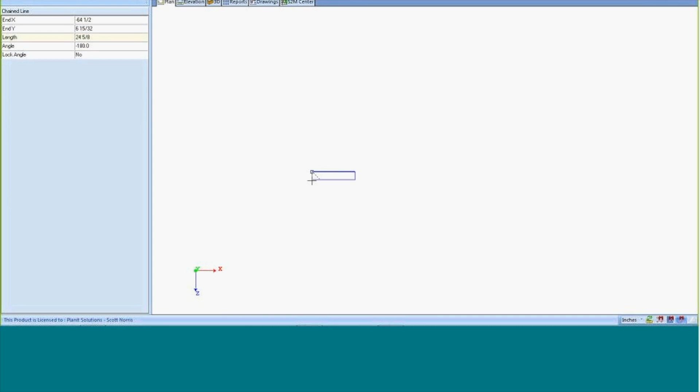If we click on the back wall, click on elevation, go to 6, you will notice you have a Planit Closets V8 catalog in your system now. That's part of the Planit Closet package. If we click on the Planit Closets V8, notice you'll have closet panels and then all the sections.

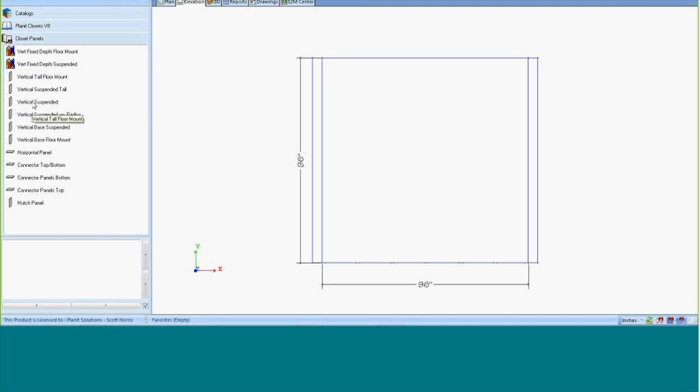Click Closet Panel. First thing I'm going to do is simply throw out my panels and then position them. So I'm going to go a vertical suspended. I'm going to right click and copy it, and when I drop it, I notice I'm going past the wall. When I drop it, it snaps right to the edge of the wall.

And I'm going to grab maybe some floor mounted panels, put this out in the center, and then right click and copy this. I'm going to use my clearance. So in the upper left hand corner where it's highlighted in blue, I type in 30 inches. What that does is position it 30 inches apart from the panel.

From here, maybe I want to position that center section right in the center of the room. If I rubber band around both of them and simply right-click on one of them, I move them. That creates one big object box so I can move it all at one time. Okay, center position. This is a 96-inch wall, I'm just going to simply type in 48. It's going to center everything right in the center.

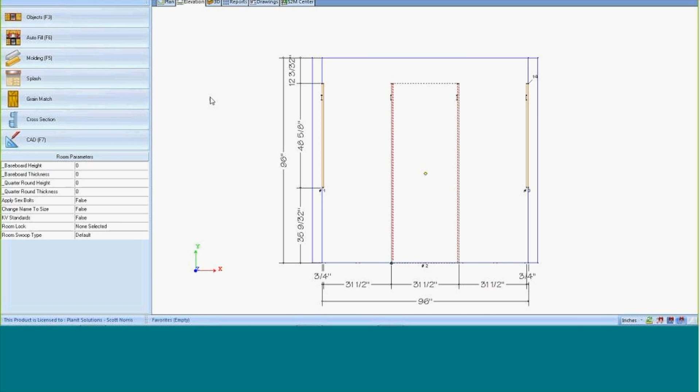Here, all we'll do is grab my sections. So let's go ahead and grab some hanging sections, suspended, hang, drop it here, maybe a long hang, this one out here. In the section, let's go ahead and put shelving in there.

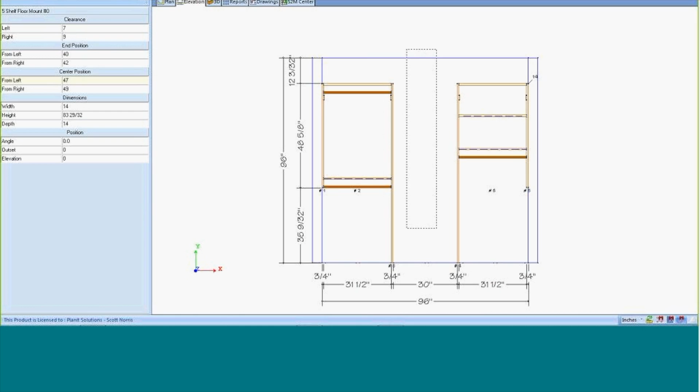And then you notice the object box, or the dotted line there, is smaller than the opening. When you drop that thing, it's going to position itself and also stretch to fit and be the two partitions. Everything is nice and tight.

From here, we're going to use some options that we have in the system with the closet package. The first option is my baseboard heights. If I simply type in my baseboard height of 4, maybe a 1 inch thick, and then we have quarter round as well. So we'll go 3/4, 3/4. So a baseboard that's 4 by 1, and then I have quarter round that's 3/4 inch.

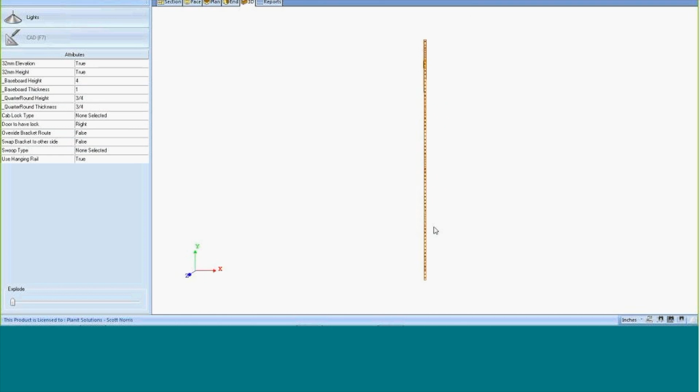What that did is actually put it in operation on the bottom portions of our panels, so it notches itself around that baseboard. As well as the center section here - look at this thing closely. The adjustable shelf has its 13 and 31/32. The shelf here actually cuts back 1 inch because that baseboard comes right behind it. To accommodate, depending on how big the baseboard is, it will accommodate things that are stuck in front of it. That way you don't have to cut things down in the field.

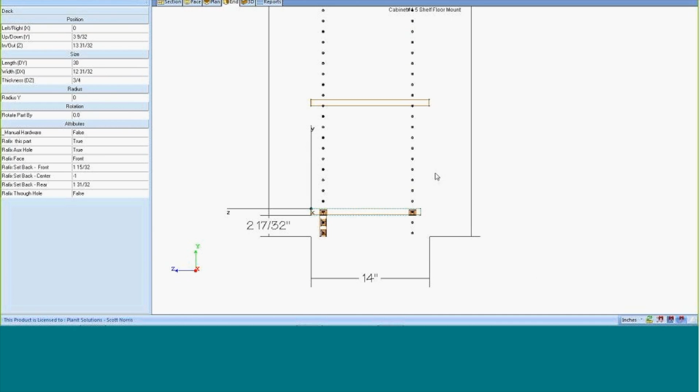The reason this is here is because you can actually control exactly where you want it to go. If you keep it true, it's going to fall to the nearest bore pattern. If you change it to false, it's going to go exactly where you want it to, which may not fall on a 32mm boring system.

So if you change it back to true, you'll notice it went back to 40 5/16 instead of 40. So the holes will line up across your system. I'll put that thing back where it's supposed to be - just click it and drop it, and it snaps to where it's supposed to be.

Also, the 32mm height - what this means is I control the height of the panel as well. So if I take the panel from 48 5/8 to 30, you notice the panel went to 29 and 30 seconds instead of 30. If I switch that to false and take that panel, say I want to go to 35, it's going to go to exactly 35, which is not a true 32mm system.

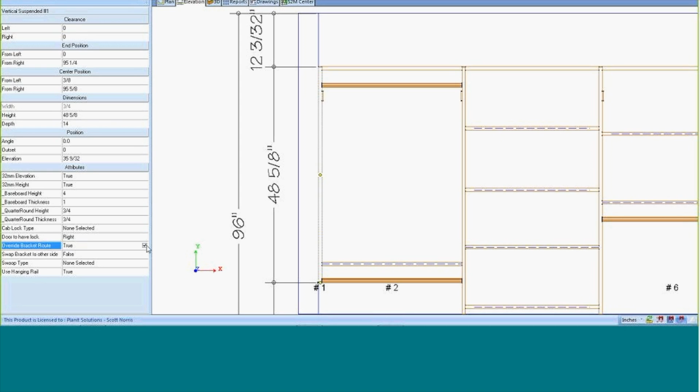I also have the option to swap brackets from side to side. For instance, in this section, maybe I want the brackets to be on the inside for whatever reason. If I click on the panel and swap the bracket to the other side, it simply swaps the bracket to the other side of the panel. Same thing on the opposite panel here, and that will put the operations on the other side as well.

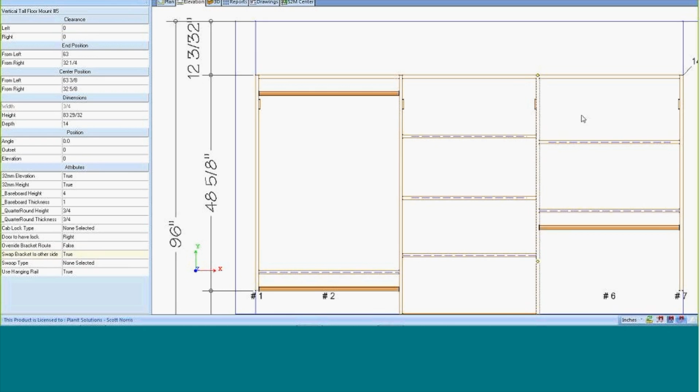The other thing is maybe I don't need this. Since this is floor mounted, maybe I don't need those suspension brackets. I can simply come down here and say use hanging rail, and turn them off. For this, let's go ahead and leave them off.

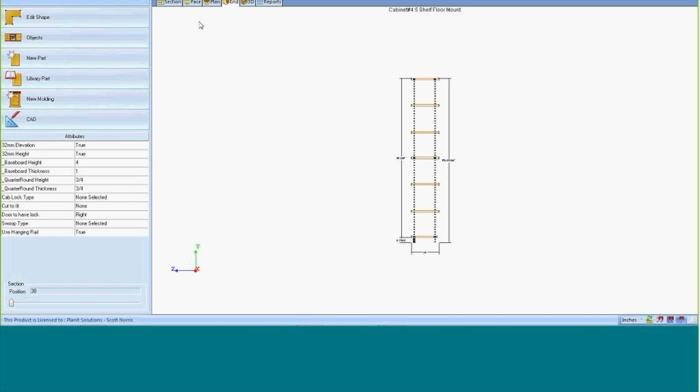Let's go ahead and show how easy it is to create your section out of an existing system, an existing section. If we click on the center section and edit it, I'm going to do the section view. First thing I'll do is go to the face view and delete everything that's in the system, which will leave me with basically a top, a bottom, and a toe kick. So I can actually build that section.

First thing I want to do is actually split the face of the cabinet, or the face of the section, into however many openings I want. So if I want drawers on the bottom and shelves on top, I'm just going to do 2 equal openings.

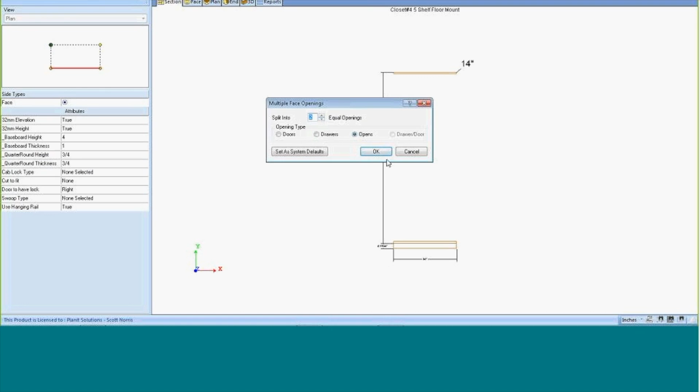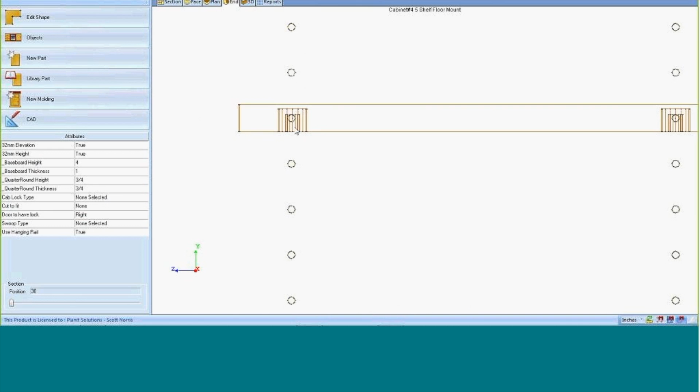Then I'm going to go inside the section and put that shelf where it's supposed to be. So I'll click on horizontal member, click on that line, and it drops in a fixed shelf. If I look at the operations happening and look at that shelf specifically, you can see the Rafix fittings are actually dropping right down to line bore, exactly where it's supposed to go. Let's look at that a little closer as we drop more things into the section.

So what I'm going to do is go back to my face view. I'll click on the bottom half of this and split it horizontally multiple ways. I'm going to stick in 4 drawers. That basically created 4 equal-sized drawers in that opening.

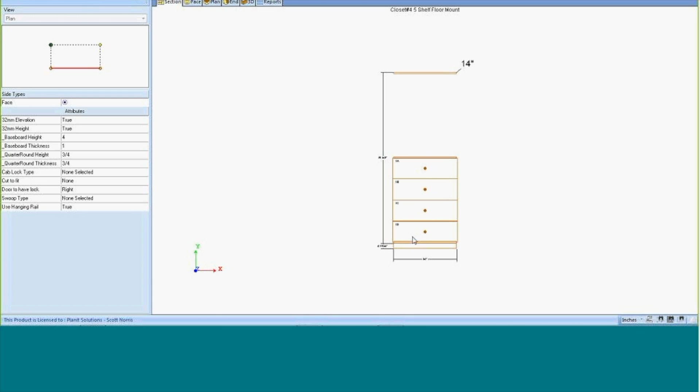Maybe Mrs. Jones wants a 10-inch drawer on the bottom and 3 sevens above it. So how do we make that? We click on the bottom, type in 10 inches, and hit enter. It automatically defaults back to 9 and 31 thirty-seconds. The reason for that is it's actually falling on a 32mm system. So I'm going to go ahead and lock that height on the bottom.

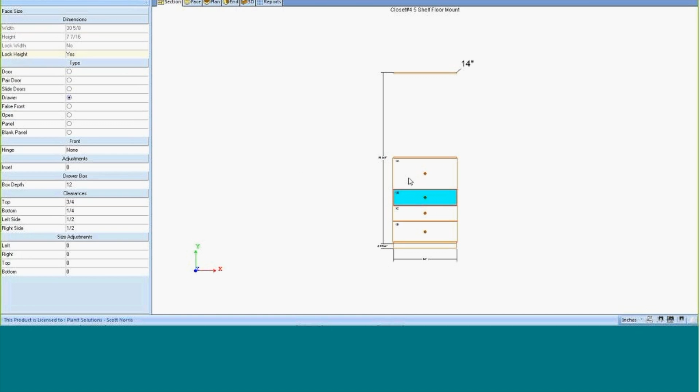As I work my way up, I'm at 7 here. Let's go to 7 and 7/16, again another 32mm system boring pattern, and lock that one. As I work my way up, I'll lock each one so the one below it won't move after I've already changed it. Then notice when I use the top shelf or top drawer here, that shelf is going to come right along with it. So I'll hit 7, and you notice that fixed shelf drops down with the top of that drawer, so our reveals stay exactly where they need to be.

Let's go ahead and put in the adjustable shelves, and then look at the system. So I can say adjustable shelves, equal openings - if I say 3 equal openings, it's actually going to put 2 shelves in. So I'm going to say I need 5 equal openings, which should put 4 shelves in.

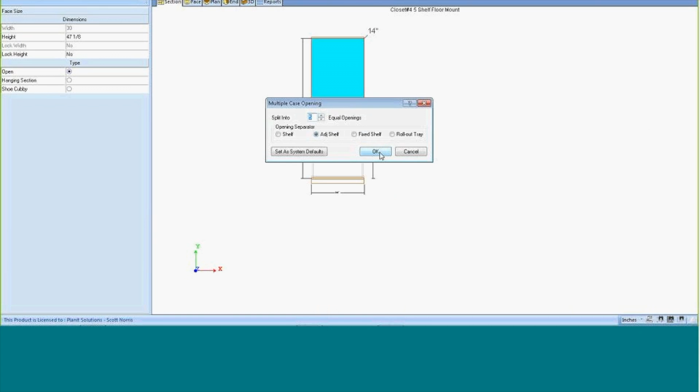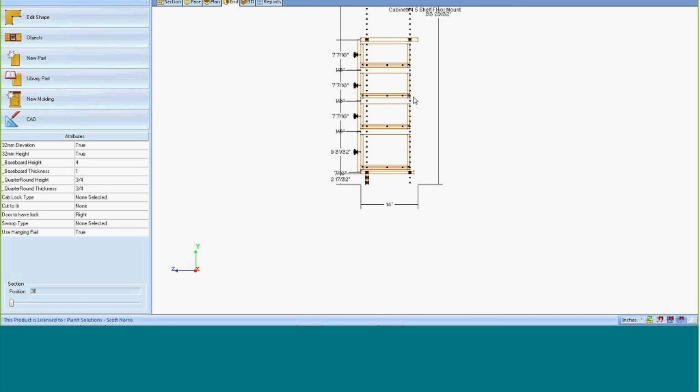Now, since I have my shelves and drawers in, let's go ahead and take a real close look at the operations happening and where those pieces are actually sitting. If I roll out here, you can see the operations for my drawer glides are lining up with line bore, as well as my drawer gaps lining up with line bore, and my reveal, depending on what your top and bottom reveal is, dropping right where it's supposed to go. My adjustable shelves are sitting right where the line bore is, or at least where they should be - everything is just happening like it's supposed to.

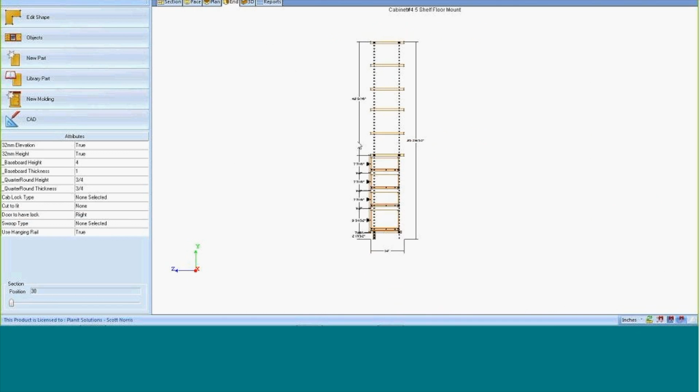Let's look at a couple other options - Rafix fittings. If we zoom in here, you can see the Rafix fittings on this shelf. I'm going to double click on the shelf, and we can take a look at what's really happening. So the shelf has a cam hole with an outrigger hole. Same thing on the other side.

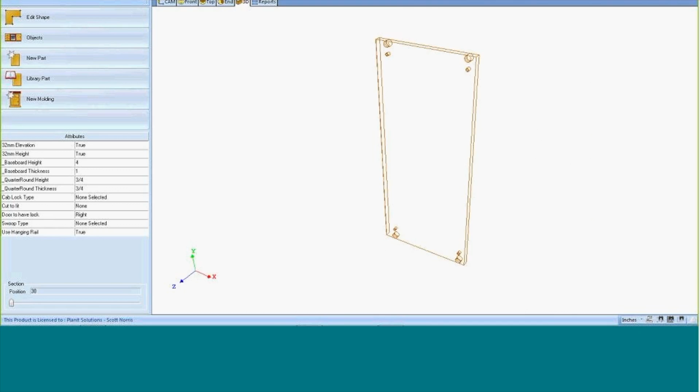What I'm going to do is actually start modifying some of this stuff. If I click on it, click on the shelf, I have my options over here again. The Rafix this part option - if I change that from true to false, the Rafix fittings goes away, which is not what we want to do on this part.

Let's look back at the Rafix auxiliary hole. Change that from true to false, and that's what happens. Typically you'd take the outrigger hole off the part. So the auxiliary hole is actually the outrigger hole on your cam.

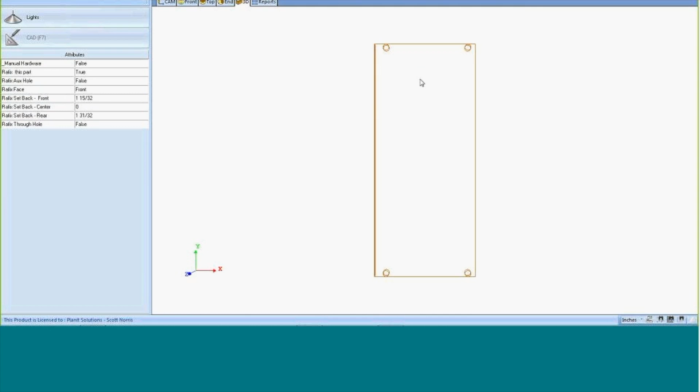I'll turn that back on. There's a Rafix face option - I'll change it from the front face to the back face. Basically, it flips it to the opposite side of the part, since you may use this to gain access for tightening the Rafix fitting down. We also have another option, I'll put that to the front, to tighten the Rafix fitting from the opposite side that it's drilled on.

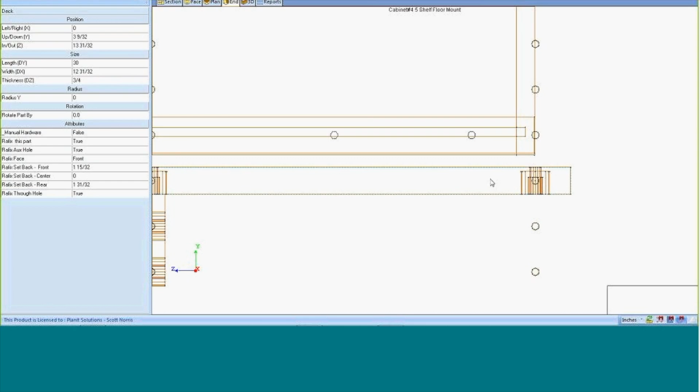If I turn the Rafix through hole on, changing it from false to true, you'll notice there's an operation in the center. What it does is drill a hole all the way through the part, so you can bring the Rafix fitting down from the top of the part versus trying to get a screwdriver up underneath and tighten it from the bottom. You can tighten it down from the top and then place a cap over it.

So there are a couple few options that we have with the Rafix fittings.

I'll change that back to false - actually, I'll leave it to true. You also have the ability to move the Rafix fittings. So the fix setback from the front is the distance from the front to the center of the Rafix fitting. If there was a third line bore in this panel, which there's not, it would have a center setback, so you'd be able to control that center Rafix fitting if there was one.

And the back Rafix setback in the rear is the distance from the rear of the panel to the center of the Rafix. Let's change that to 8 inches. What that does is push that Rafix fitting on the back of the panel forward.

Now, if you change that and want to get it back to what it originally was, you can simply shut the Rafix off and turn it back on, and it will automatically reposition itself to where it's supposed to be.

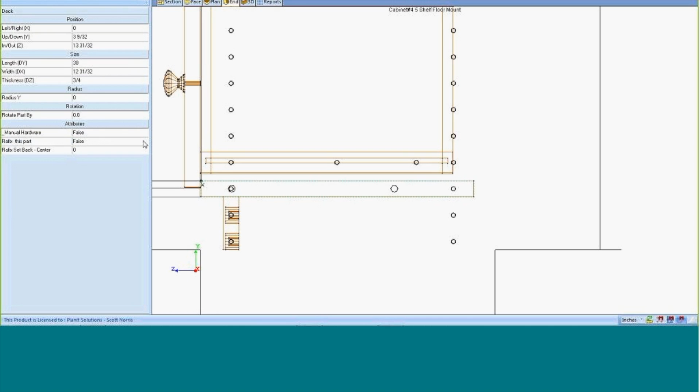There's actually a cut-to-fit option in the system. Sometimes closet installers like to not drill this portion or that portion of the system and actually oversize it, then cut it down and fit it to the wall on site.

If you click on a section, you also have a cut-to-fit option here, with a drop-down for either the left or the right. Depending on which you pick, it's going to oversize that section on the left side or the right side.

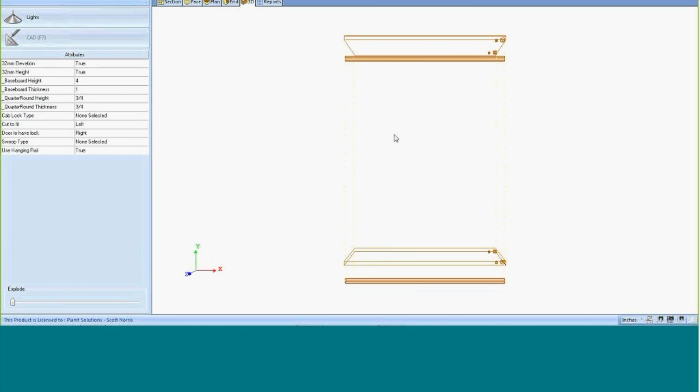If I click on the left side and look at this section now, you notice that the left is not drilled. So the top and the outlet rod are 4 inches bigger than they're supposed to be.

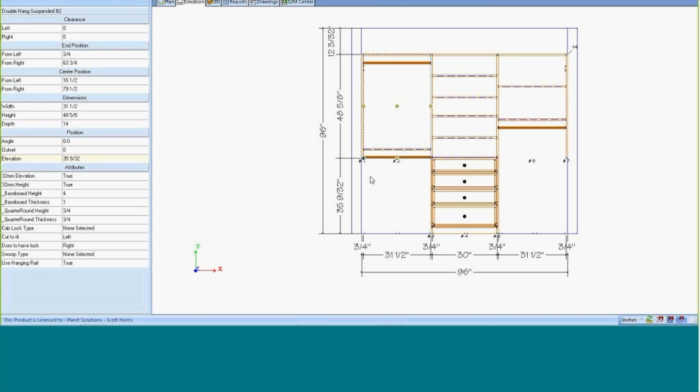The setting in our system oversizes those parts 4 inches bigger. If we look at the actual section, you can see it's supposed to be 31.5 inches wide, and they're actually 35.5 inches wide - oversizing those parts. Pretty cool feature if you actually go and cut things down on site.

So basically, that's the closet module and all the options.

Now let's go ahead and look at making this a pretty presentation. I go to Plan View, right-click on the screen, and go to Drawing. What that does is take a scalable image.

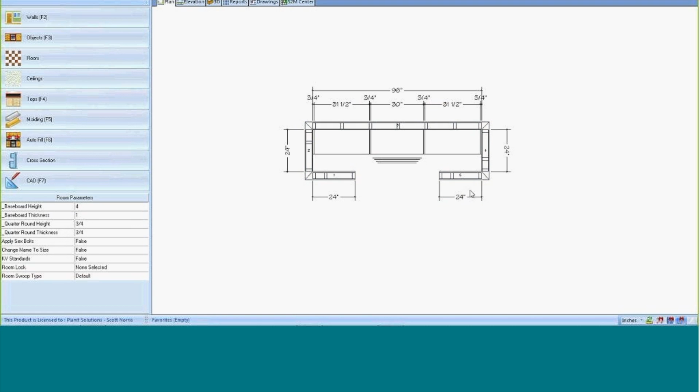I'm going to go to the elevation, click on the screen again to Drawing, taking another scalable image. Now I'll go to Plan View and turn on and hide those walls.

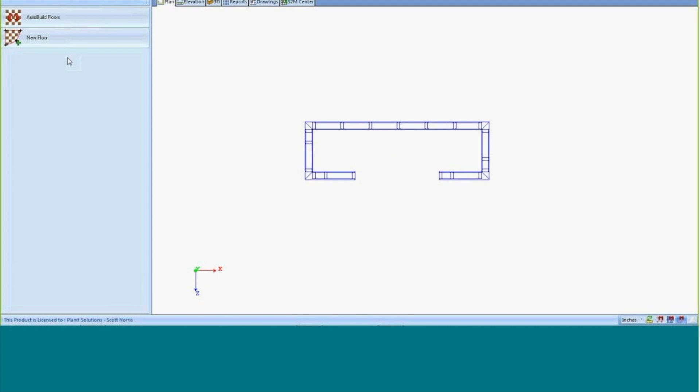Simply go into 3D mode. Now I can actually view the closet itself without those walls sticking out in front of it. I'll go back to a plan view and throw in an auto build floor, so we basically put a floor object in our system.

When you're in 3D mode, you can click on textures here. Click on floor and grab one of the floors, then click on the back wall or on the walls - we'll just do a rough plaster. They kind of look pretty.

Now if we go to PhotoVision, we can go to full architectural and see what this closet's really going to look like.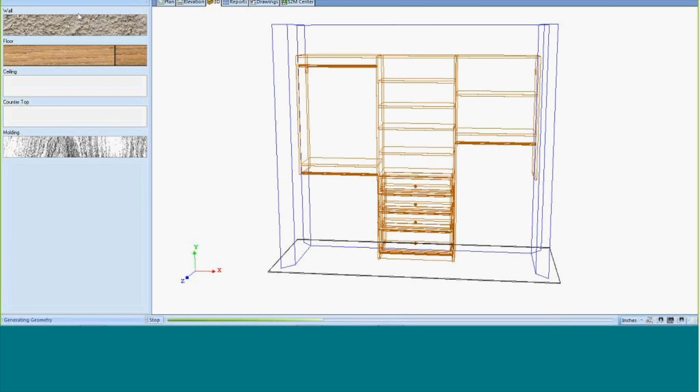You take that drawing or render, and you can send it to Mrs. Jones to let her see what her closet's going to look like.

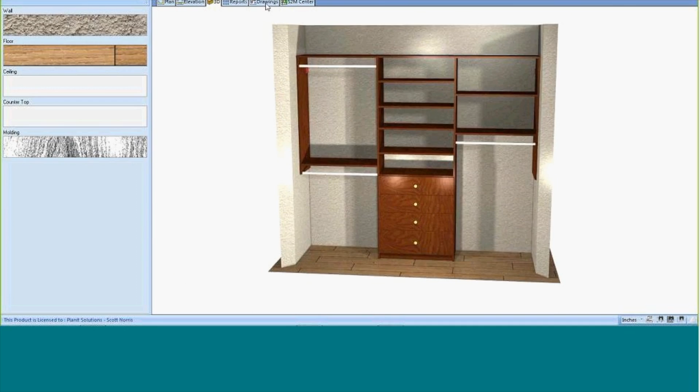Back to another 3D mode, I'm going to go to Drawing here, and then to my layout page. Click on Room Plan, drag it here, and there's my plan view. Elevation - there's my elevation view. And 3D. Then you right-click on anything and can scale it up or down. I'm going to go ahead and scale it up so we can see it.

And then detail it out as much as you possibly want to, and send it off to your customer.